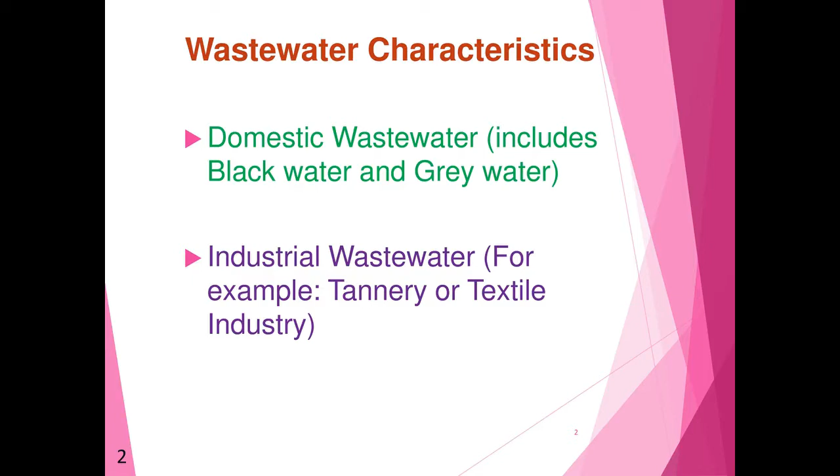Why I took this wastewater as a topic today is because water is becoming a big demand now. It is a big important issue to talk about for the future, for the coming decades. Water is going to be given more importance in the future to come, due to the crisis and the water demand we are expecting in the near future.

Due to scarcity of water, of course water as such is there, but it is not in usable form. Either it is contaminated by some means, by human activities, etc., so it is not available in pure form for consumption.

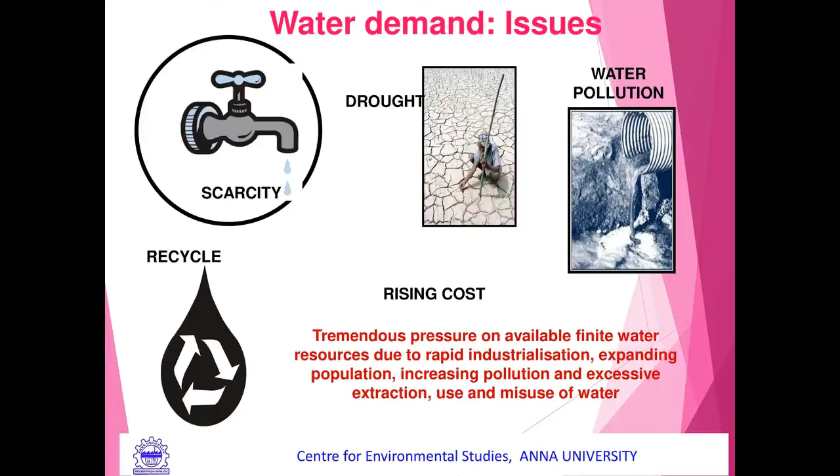Plus, the water crisis is also compounded by drought. We don't get essential rains every year, so the quota possible for the country is reducing. Then there is pollution of water bodies, either groundwater or surface water bodies, standing water bodies or running water bodies, there is continuous pollution that we are witnessing. So there is a demand for water, which we are going to address in this presentation.

It is not a crisis for India alone, it is a worldwide problem. The same case is seen all over the globe. I have some statistics here: we can see from the slide that 844 million people lack access to clean water, that's what the UN data says. Over 2 billion people live in countries experiencing high water stress.

I will show you what are the countries in water stress shortly. So 2 billion people live in water stress areas or countries. And we see in 2040, approximately 600 million children are going to be there in a water stressed situation. UNICEF is talking about this. And 700 million people worldwide could be displaced because there is no water. This is what we are going to witness in 2030 and beyond.

Over half of the global population, approximately 4.2 billion people, lack safely managed sanitation services. So sanitation is given more importance. That is one of the prime causes for contamination of water bodies. Approximately 3 lakh children die every year due to the disease called diarrhea, diarrheal diseases, that is due to fecal matter contamination. This is what is happening all over the globe.

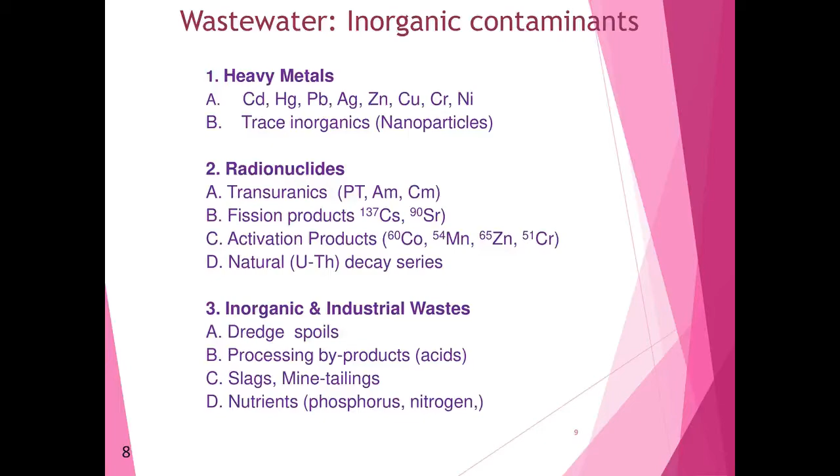And then nutrients, phosphorus and nitrogen. These two nutrients are very important as far as the wastewater is concerned, mainly because they cause what is called eutrophication.

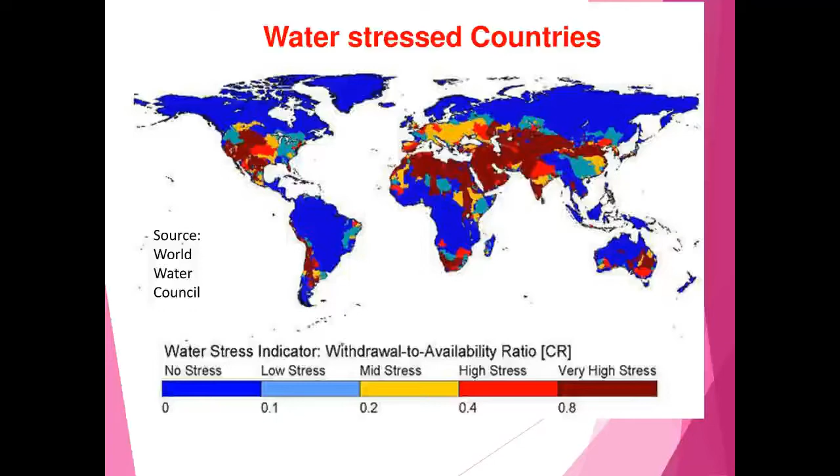So now this is okay, I think I clicked somewhere. It has gone. I think I put it back. Okay, coming back.

Right, okay, so this is industries. As far as the industries are concerned, they also contribute to the pollution. That is more toxic pollutants come from the industries, like you have a paper mill industry, tannery industry, textile industries, and so on. They have toxic effluents which have to be treated.

So they also generate a lot of wastewater, and now the government of India and the Pollution Control Board are talking about the zero discharge concept, and they are supposed to reuse back into the industry by treating their own wastewater. At least 80 to 90% is supposed to be treated, and then they have to use it in their industry. This is what is being contemplated, but how far they are doing that we have to see.

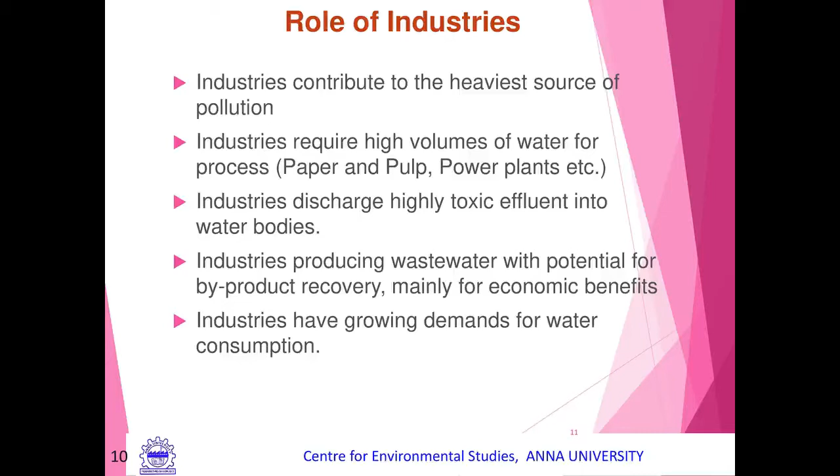And distillery industry also uses a very large amount per liter of alcohol. They use several liters of water, and tanneries as well. So the distillery industry is classified as a red category industry. This is not an ordinary industry, it is called a red category industry, so they have to manage the toxic wastewater, treat it, etc.

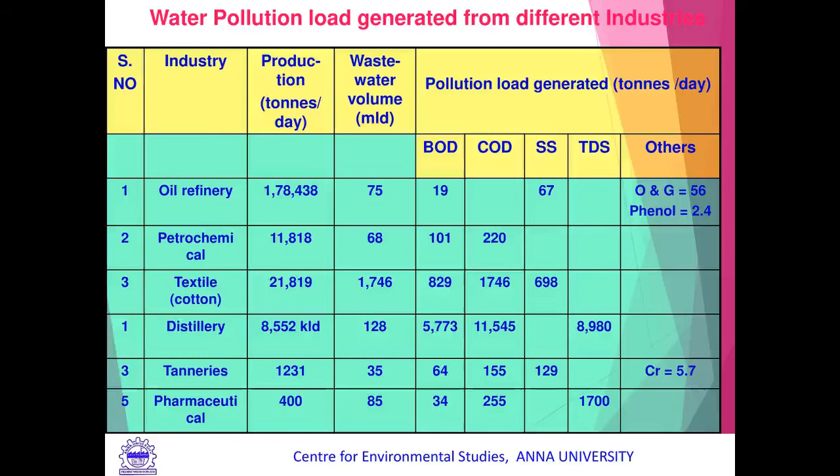So many of these industries like pharmaceutical and tannery produce what is called high TDS wastewater as well. High TDS wastewater is another sector where only a little amount of work has been done, but mostly they use it. I will talk about this in a later section also.

And then how this industry is supposed to reuse water. Also the agricultural sector plays a major role in the use of water. As we know, India is an agriculture country basically, so we have agriculture as a main livelihood. We produce a lot of grains, etc. And the government also has provided free electricity, so the farmers try to pump enormous amounts of groundwater if the stored rainwater is not available.

So this is another thing which we have to talk about. And as you know, a day or two ago, the government of India is also trying to bring in some changes now to keep a hold on the use of electricity by the farmers.

So thermal power uses large amounts of water. Our coal thermal stations are using large amounts of water. Then iron and steel, paper production, textile industry, and petrochemical industry, all use large amounts of water. They are supposed to reuse it, the concept of reuse they are supposed to adapt.

Okay, next slide. So in this we can categorize them as what is biodegradable and what is non-biodegradable, or I put it as recalcitrant, a little bit difficult to degrade. So industry produces wastewater which may contain biodegradable or non-biodegradable components, fully or partly. That we have to see, it varies from industry to industry.

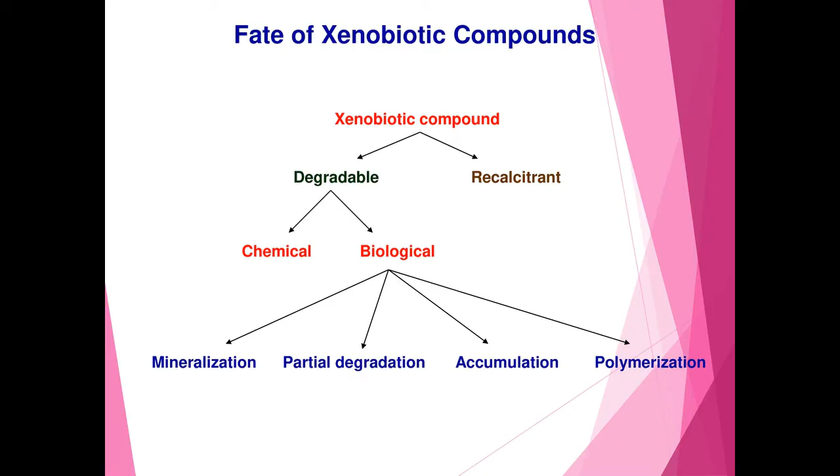It may not be degraded, but it can accumulate - heavy metals can be a good example. Then polymerization can happen. A variety of chemicals can get polymerized and it is not further degraded, or it can go into the non-biodegradable state.

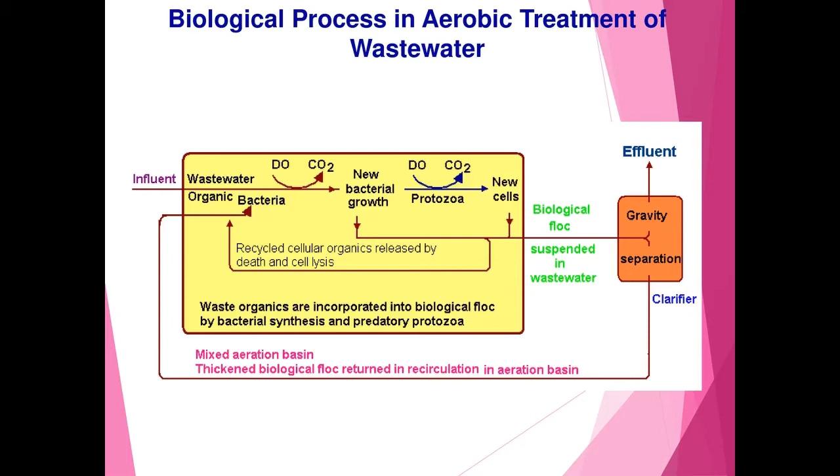If it is completely degraded, as in the case of sewage - of course sewage is also not 100% degraded in any treatment plant, it can reach only up to 80 to 90% or so. So the effluent we get from the wastewater can be used depending upon its quality, and reused, or you can improve the quality as per the requirement of the industry or concerned sector. This is the normal process that happens.

As this is aerobic treatment, what happens in this case? Here you can see the organic contaminants, and oxygen is pumped inside through aerators. Nutrients are also provided, and a large amount of bacteria called the heterotrophic population will degrade the entire biodegradable organics, which is BOD, on a large scale. So it degrades, and we get carbon dioxide and water as the final product. This is what happens in all types of aerobic treatment systems.

In case of anaerobic treatment system, we get carbon dioxide along with methane. Methane is the largest gas produced - around 50 to 70% methane we can expect, depending upon the type of waste raw material we are trying to digest in the anaerobic digester. So carbon dioxide will always be a lesser ingredient compared to methane.

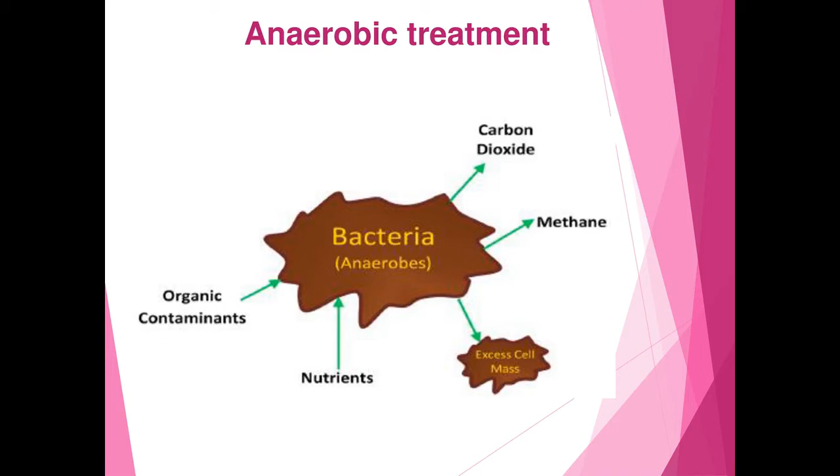And apart from this, there is also what is called hydrogen sulfide. This will be there along with that, but much less. So that sulfide component also has to be looked into in the anaerobic treatment system.

In general, we have this pollution control hierarchy. What it talks about mainly is the manufacturing process itself. Instead of using the age-old process which produces lots of toxic end products, we can go for the latest technology or latest process - it's called an alternate or appropriate technology, so that it may not produce more toxic end products, giving less toxic product.

Then optimization - this is another important topic, whether the raw material is optimized or not, because in most cases the raw material used will not fully go into the process, since some will not be consumed and will come out in the effluent. A good example is the textile industry - the dyes may not be used up in the process, but can sometimes come out depending upon the type of dyeing or bleaching process used.

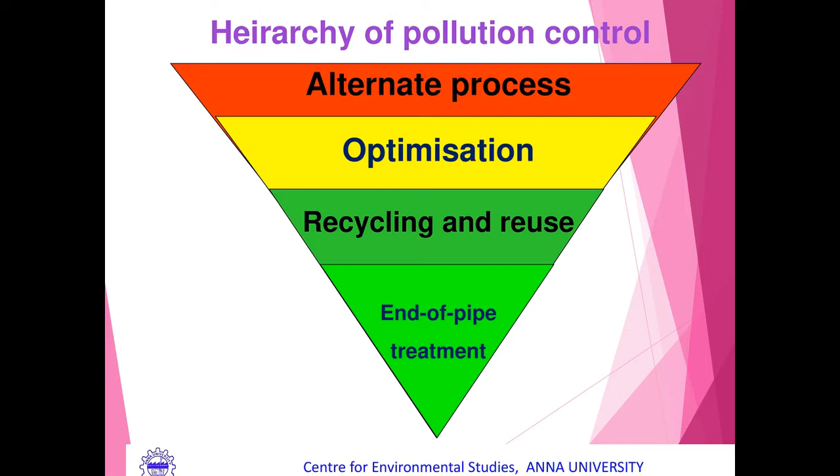So whatever amount cannot be reused can go for other types of treatment, or it can be disposed also. For that we have landfills, etc. Some toxic products, sludge or sediments can be taken to the landfill if it is hazardous in nature. This is the typical wastewater train, what we can say here, for municipal wastewater.

So we have the preliminary treatment, which is mainly to remove the suspended particles, heavier particles, etc. Primary treatment is given again, and it removes up to 35% of the BOD easily. The heavier particles that contribute to the BOD can be removed.

Then you have the aerobic treatment, etc., which is called secondary treatment. Here the major BOD gets removed, up to 85% can easily be removed by a properly functioning treatment plant. Then you can go for advanced treatment, where we can remove the rest of the BOD along with some amount of nitrogen and phosphate, and then finally go for disinfection.

Disinfection comes last because it contains the pathogens, especially the bacterial pathogens. Mostly in industries we only talk about bacterial pathogens, but I think in future we'll talk about viral pathogens as well. Pollution concerns will also give direction to look into viral pathogens, because coronavirus is going to be part of the sewage. That is going to happen now in future.

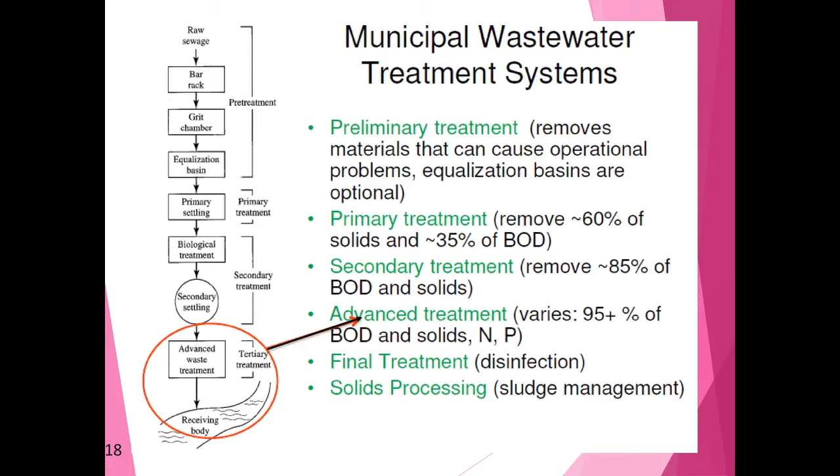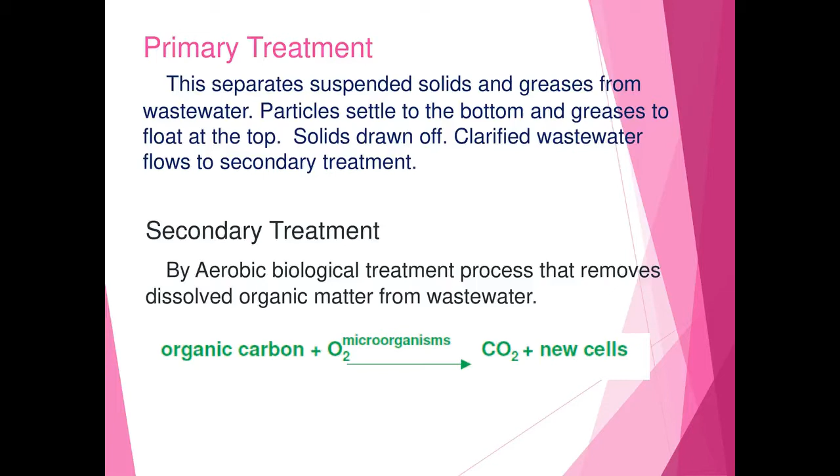This is what is being practiced, or advocated, in most industries and sewage treatment plants. So primary treatment, as I told, takes care of the heavier particles, etc. And in secondary treatment, the organic carbon is converted into carbon dioxide, and we have the biomass. This is common for all types of treatment plants.

So what are the different types of treatment plants? Generally, basically, we have the stabilization lagoons and stabilization ponds. This is what we have previously been practicing. Still, if you have a large amount of land, lagoons and stabilization ponds can also be practiced. There is no harm, because it doesn't consume any electricity at all.

Then you have facultative lagoons, aerated lagoons. So you have a variety: facultative lagoons, aerated lagoons, anaerobic lagoons, or mixed types. Then we have suspended growth, which mainly refers to the activated sludge process. Normally, the majority of domestic wastewater treatment plants actually use activated sludge treatment.

Then this new generation sequencing batch reactors have come, with both aerobic as well as anaerobic processes. Then oxidation ponds, where there can be a combination of different things also; it may not be the same. Depending upon land requirement and availability, there can be more than one treatment train in the same campus.

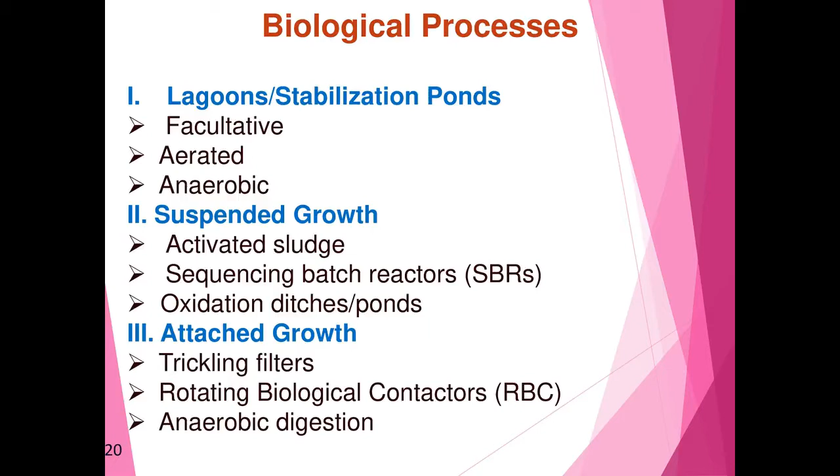Then you have the attached growth process, like trickling filters, rotating biological contactors, and anaerobic digestion. This anaerobic digestion can normally be practiced wherever we have high BOD wastewater. If you have low BOD wastewater, it is not advisable to practice anaerobic digestion at all, since you won't get the byproduct methane as additional revenue.

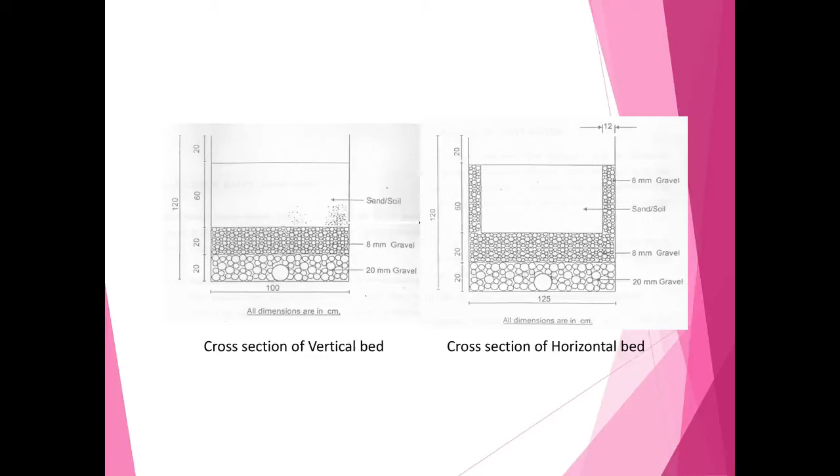So this is one important photograph which I have also done myself. It is called a root zone treatment system, or otherwise called a constructed wetland system. This is also another treatment unit mainly for domestic wastewater, though it can even be practiced for industrial wastewater as well. Here we have the vertical flow system and the horizontal flow reed bed system, or constructed wetland system. It is constructed, it is a natural treatment — wetlands are there, so it is imitating a natural wetland.

So we can construct a wetland system which we can practice, or construct, in any place we want. This is another work which I was also part of, not here, but in Europe. So we can use the same system; it is otherwise also called phytoremediation.

This also can be used for heavy metal removal. What happens here is the heavy metal can be precipitated at the bottom, and pH plays a major role in this case. There are also treatment plants where they practice having the heavy metals absorbed by the plants. The point there is how you dispose of the plant with the heavy metals loaded in it. Some plants which are having fodder value cannot be used in that case. Of course, it can be composted, or it can be burnt or incinerated.

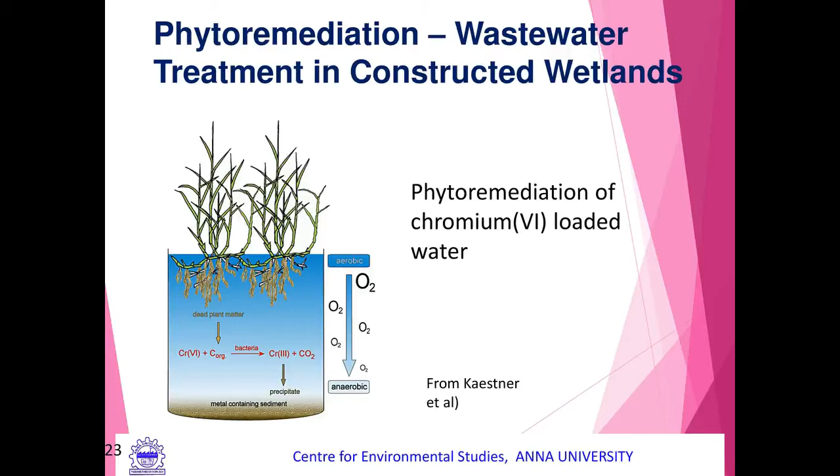Disinfection is another important thing. If we practice the variety of treatment plants, as I detailed, disinfection is another important task. You can use ultrafiltration, microfiltration, and ultrafiltration can also be used if you want to remove the viruses as well. But cost matters - how much it will cost? So everything you have to calculate from the economic point of view, as I have been telling you.

There is another part of wastewater called saline wastewater. Not all products made in industry use the regular water or regular process. Some processes generate what is called saline wastewater, and this saline wastewater is not easily treatable. Biological treatment is not generally possible in case of the saline wastewater produced in the industry. Industry only produces saline wastewater - it is not in domestic wastewater unless you use groundwater with high TDS, then only it will come. Otherwise, no.

We know seawater has salt concentration, and some industries use very high salinity, more than 3.5%, in the wastewater. Under such situations, it is not possible to treat the wastewater. Where you generate such type of wastewater, you can see in leather industry, like soak liquor, which has more amount of saline wastewater. Then textile industry also has high TDS - total dissolved solids. Then pharmaceutical industry, some products generate this, and petroleum industry also.

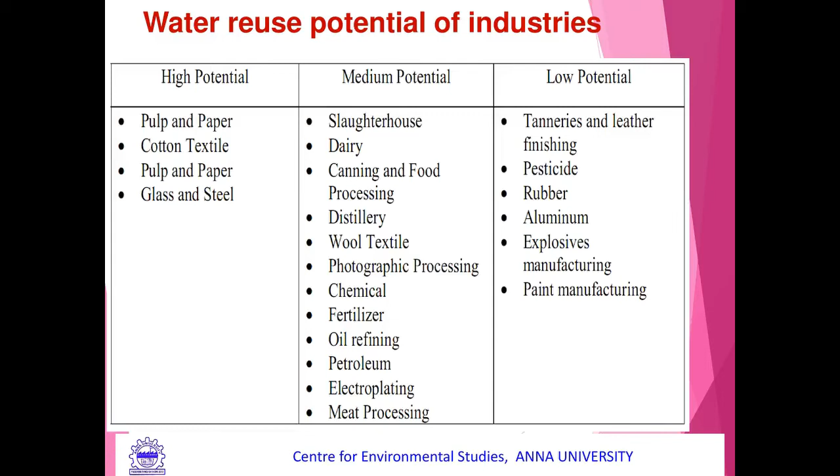Electroplating industries and meat processing industries, and less amount of water consumption generally in pesticide industries, and then explosive industry, aluminum industries, paint industries, etc. They may not require a large amount of water, so they produce less amount of wastewater as well.

Recycle is one of the important things being advocated. Water use mainly follows what I already told. The industry uses water, either surface water or groundwater, as the case may be. Then treatment - whatever water is used in the process has to be treated by a variety of treatment trains possible, depending upon the appropriateness of the treatment system. Sometimes they can have biogas also - additionally they can produce biogas. Then they have to treat it; in any way, they are supposed to do the treatment also.

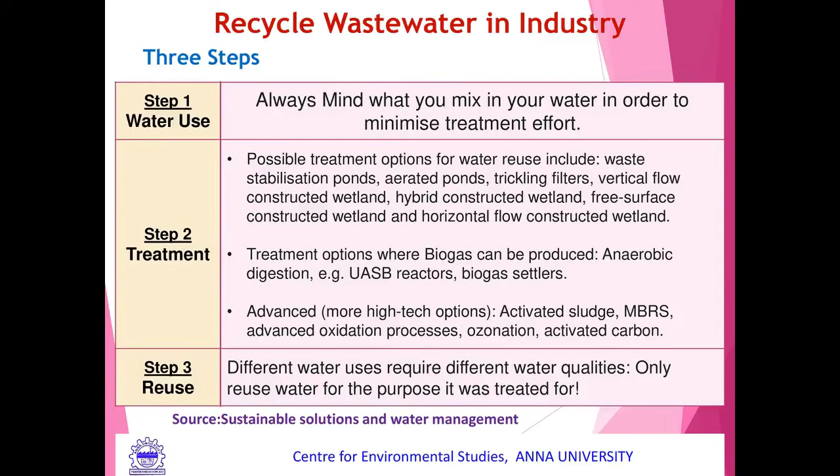This is why I thought I should tell about this, because we are trying to locate the industries. As and when the industries ask for the license, it is being given, and it is located in various places wherever it is convenient for the particular person who wants to set up. But another concept is networking of the industry - for example, the particular wastewater produced by one industry may be required by another industry.

For example, the high TDS wastewater produced by a pharmaceutical industry can be used by an alkali manufacturing industry straight away. So there is no requirement for the industry to treat and reuse it in the same industry. This end product wastewater can be used by another industry - they can produce a chloroalkali product. So that will be fully matching. We have to see which industry can match the raw material and the product they produce. The solid material produced by one industry can also be made use of by another industry.

Now we are talking about wealth from waste. So we can generate, take out useful products or materials or elements from the wastewater as well as sludge, and it can be recovered, like what they do in e-waste. In e-waste, they take out material from the computer board, motherboard, etc., so you get a variety of heavy metals, including noble metals as well.

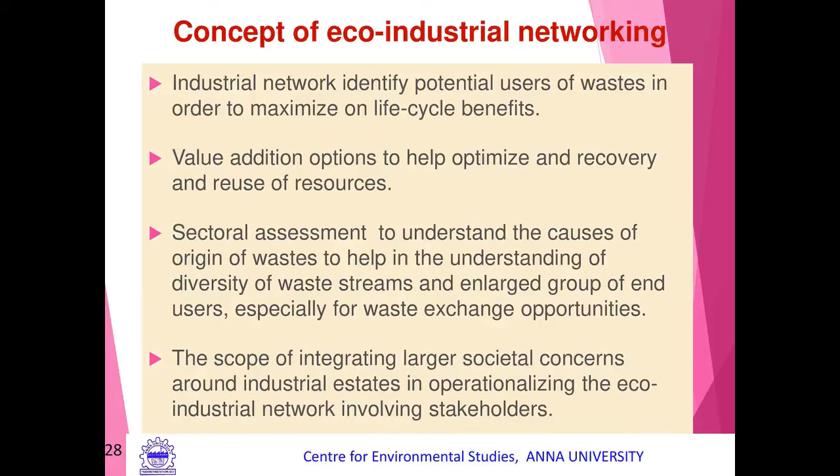So it can give opportunity for employment as well, and also the coexistence of more than one industry - a group of industries can be housed in the same sector. So there will not be the problem of effluent generation or effluent being let out without treatment. This is important. In many other countries, and in some other states, they have planned this, but it requires very careful planning, and the product they manufacture has to be very clear. Then only it is possible. Otherwise it is not so easy - it's quite complicated and has to be done in a proper way.

Wastewater can be put to a variety of uses depending upon the contamination it has. For urban use, we can use it for irrigation, landscape, and toilet flushing. So now for toilet flushing we can use domestic wastewater - treat it by the methods I told you, and have a separate line from the treatment plant, then use this only for flushing, not for handling.

But here also we need to see how best the treatment is being given - then only it is possible. There should be disinfection also as a component there - mainly the disinfection has to be there, then only it can be flushed. So all these things have to be given.

Then we have agricultural use - agriculture along with the household nearby can be complementary to each other. You can use wastewater produced in the domestic sector, household, for agricultural use, which reduces the burden on fresh water for the agricultural sector, both from surface water bodies and from groundwater. Then environmental use - you can create artificial wetlands. We have been talking about how wetlands were useful in the tsunami. So we can create artificial wetlands which can take up large amounts of nutrients, just like natural wetlands, nearby ponds, lakes, etc.

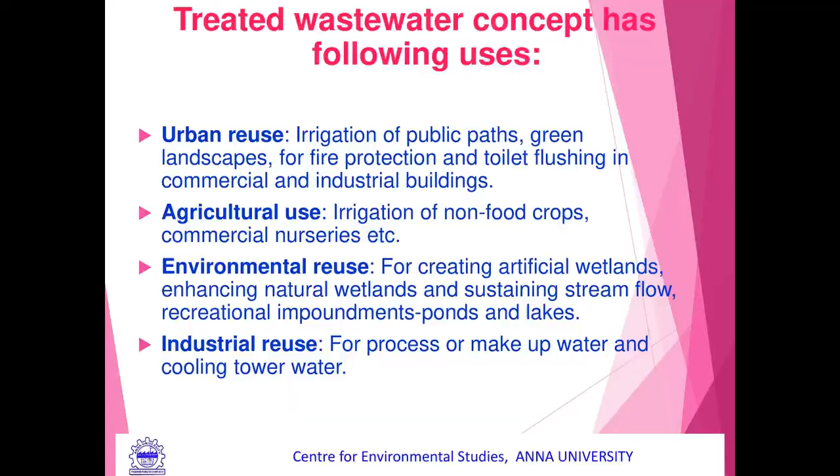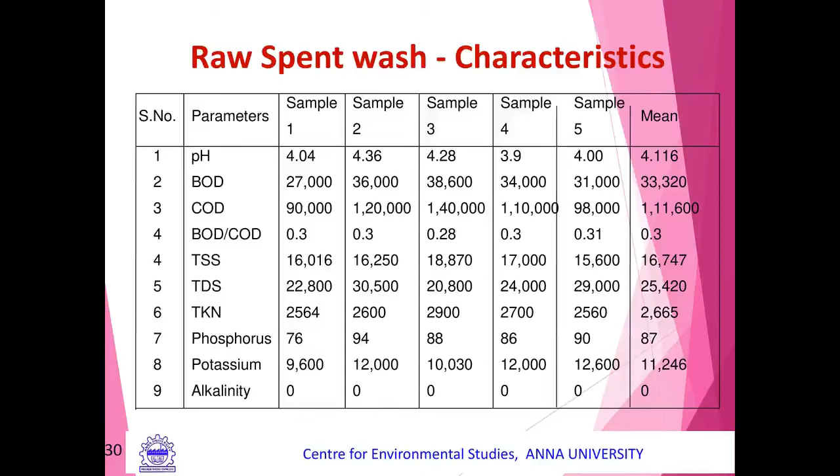So I thought I will give a few slides on the work I have done also, on industries. This is about the distillery industry, where we have this spent wash. The spent wash generally has these characteristics - here we see the BOD amount, how much BOD is available, easily around 30,000 to 40,000 etc. The Pollution Control Board also has norms for each industry, and the distillery industry has a particular norm for discharge, called discharge standards, which is being advocated.

So our aim is to make use of this wastewater after treatment, because in the distillery industry, since it will be very dark in color, they go for lagooning or they go for evaporators. They have multiple evaporators - the concentrated wastewater can be evaporated and then made into ash to satisfy the Pollution Control Board norms.

So we can treat this industrial spent wash by sequencing batch reactor, what we call SBR. We have two different processes: either ozonation followed by aerobic SBR, or we go for anaerobic-aerobic SBR followed by ozonation. In both ways, we have used some special microbial strains which can be practiced so that we can reach the quality prescribed by the Pollution Control Board.

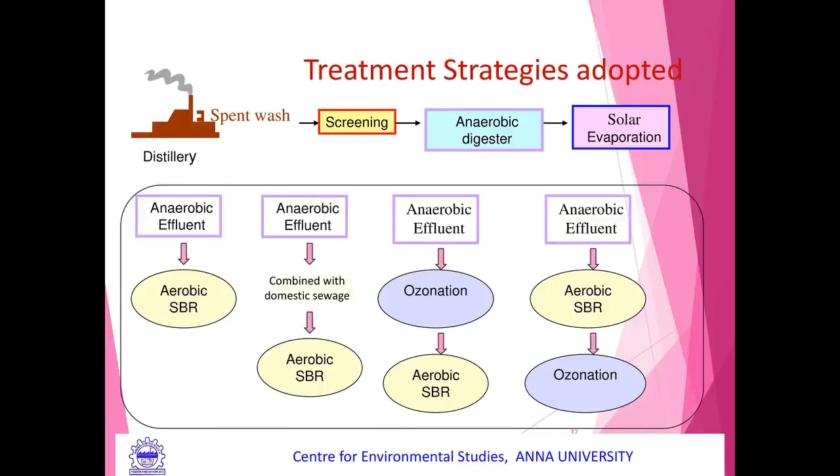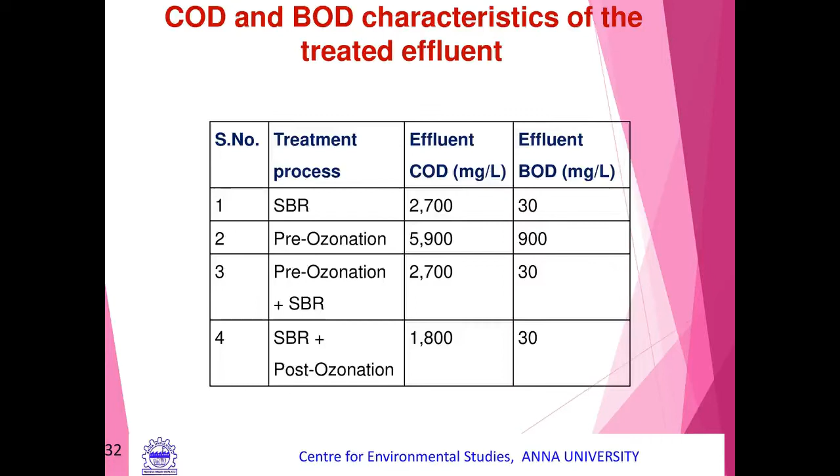So you can see here, this is what Pollution Control Board talks about, only the BOD that is being discharged. If you have 30 BOD, that means this is fine, it is acceptable by the board. So this is what we easily are able to achieve, and of course we have done some patenting of our work also.

So this is the unit operations we follow, and bring it to 30 BOD milligram per liter, as prescribed by the Pollution Control Board.

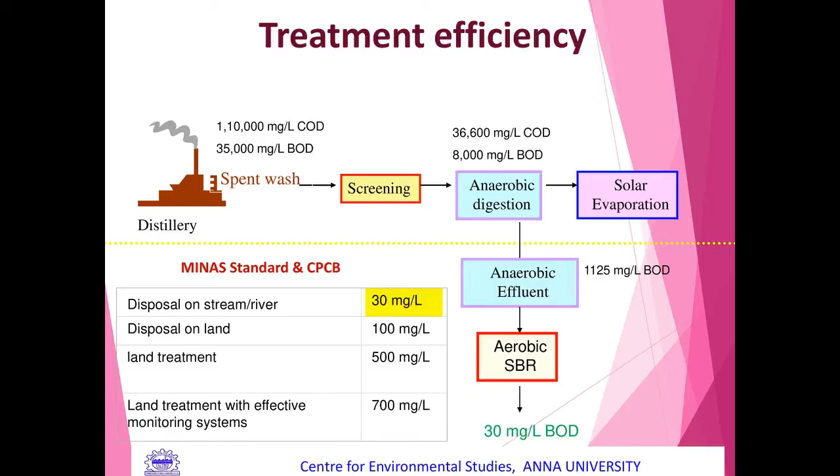Now I just go into another important emerging area, which is micropollutants. These pollutants have not been talked about for so many years, because India is not a country that talks about micropollutants, even now, and India is not going to look into the micropollutant aspect in drinking water. But in European countries, USA, Australia, etc., they are all more conscious about the micropollutants in drinking water. Of course, we are also talking about the microplastics mixed up in drinking water.

So how do these micropollutants come into the drinking water? Whatever pesticides we use in the agricultural sector, if not treated properly, have to go somewhere - they contaminate the groundwater, or the surface water body, or soil, and so on. That is the runoff from those things, or through air spray in agricultural fields for controlling pests. So a variety of pesticides being sprayed can be carried through the air as well.

And then some of them are endocrine disruptors - for example, pentachlorophenol and bisphenol, etc. These are all called endocrine disrupting compounds. I also talked about PFAS, and phthalates are also endocrine disrupting. All these endocrine disrupting compounds can damage our system. When endocrines are disturbed, each and every organ will slowly be destroyed. We never know - it is a cumulative toxicity.

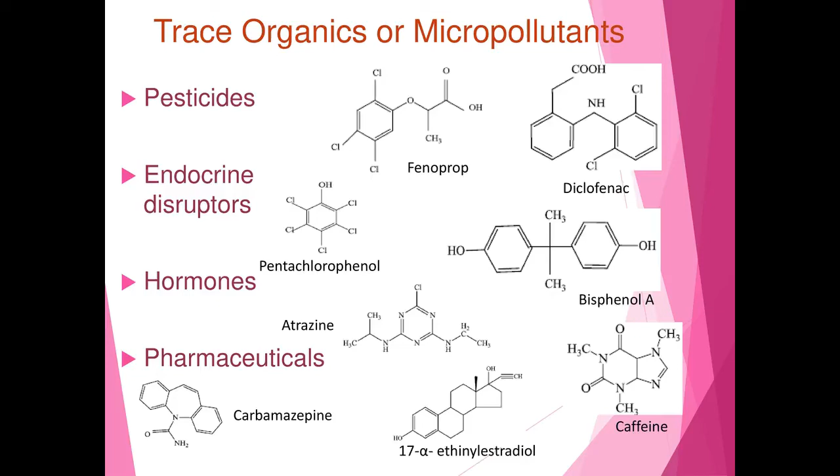So contamination of this domestic wastewater goes into drinking water lines. It will end up in water bodies, surface water bodies, running water bodies, etc., which are tapped for drinking water purposes, or even groundwater if it is contaminated by this type of micropollutants. All these things will definitely bring in some amount of micropollutants, and it is much more damaging and so harmful to the body.

In India, we are not concentrating on this, because first of all we have to give proper drinking water for the people. We are still talking about coliforms only, in 2020. So it will take some more years to include all these things. Of course, we don't have any standard for these micropollutants as well.

So it is the job of the Pollution Control Board, CPCB, to include all these micropollutants, include the standards for these micropollutants, and bring them into the BIS standards for drinking water as well. But there are different possibilities. This micropollutant can be degraded also - ozonation, chlorination, adsorption, and another aspect called forward osmosis, which is an emerging concept. Of course, we have to see which process is economical. Unless it is economical, it is not advisable.

Chlorination will generate some chloro-organic compounds in the water, so that is also harmful, and that is being thought about. You can adsorb these things on some matrix, but for a large amount of water, is it possible to do it? That we have to see. So the economics plays a major role in all these things.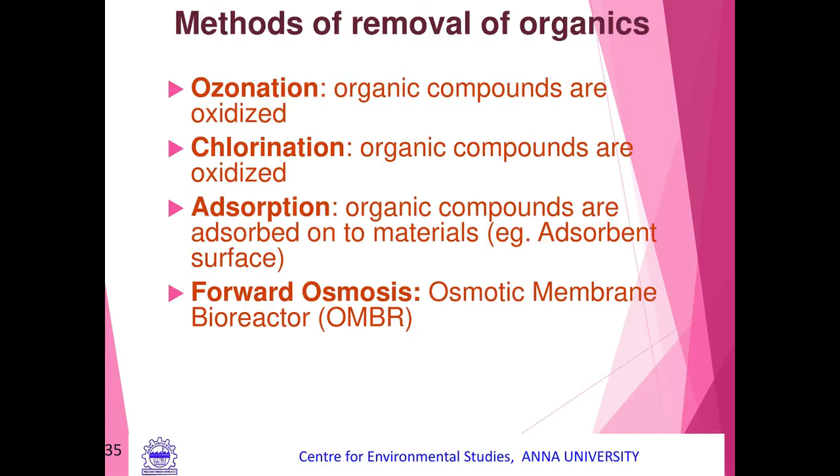And what I'm talking about now is more than 10,000, even up to 20 or 30,000 TDS, where biological treatment systems are not available. But we have the technology with us. I think we have some pesticide industries in the Cuddalore sector and other places where they produce this type of pyrethroid pesticide, mainly to take care of pests in agricultural fields. There are variety of pesticides being practiced, and pyrethroid is one variety. So if industries are interested, they can easily contact us.